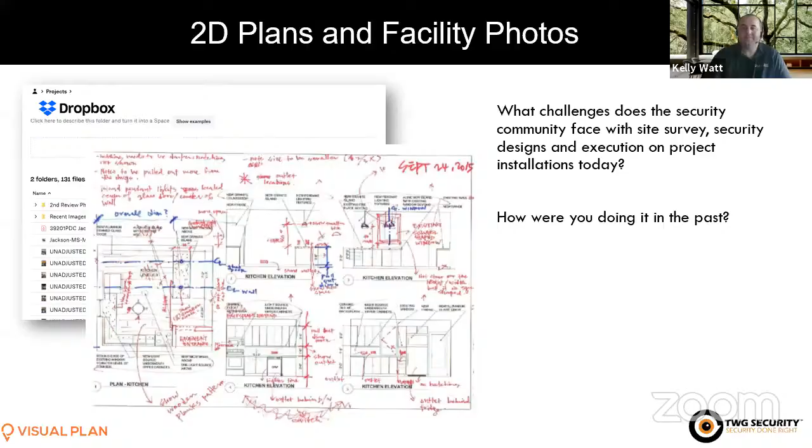Obviously we're doing a lot of remote stuff now, and being able to go into a building one time and scan it, literally take a digital twin accurate to millimeters back to my office and have my entire team look at it—instead of one engineer out in the field rushing around with clients who have much better things to do than spend all day with us. It's been useful for us in current conditions.

So tell me about the evolution here. You started some research—how long ago was that? What types of technology were you looking at? What did you learn from those, and where did you end up?

Great question. We started with a simple 360 photo camera several years ago, which worked out great. I can walk in, push a single button, and capture an entire 360 photo of a room. It worked out great.

I'm a very visual person, so if I take the photos and look at them a couple days later, I know exactly where I was in the building. But I can't just dump a bunch of photos on my engineering team—they look at me like they don't know where this stuff is. So I've been trying to build our own Google Street View, where I can take those photos and drop them on a plan, making it easier for people to understand, while trying to reduce production time. I don't want to hire somebody just to sit and put photos on a plan and manage that whole process—trying to keep it simple.

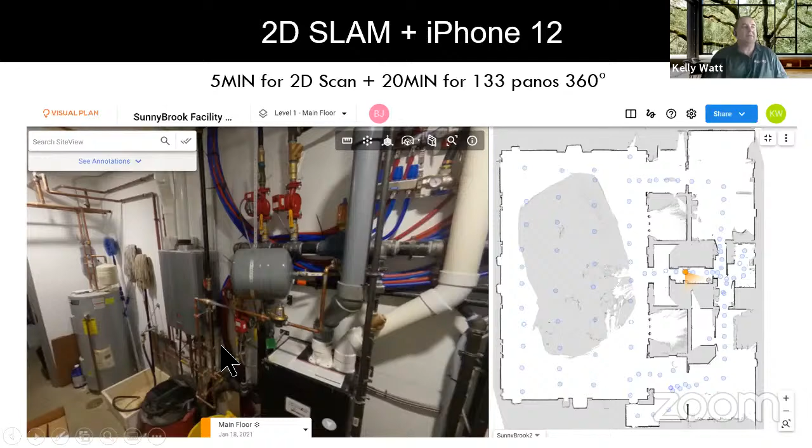So I have another example. We were playing with some 2D SLAM here, giving the audience an example of about a 50,000 square foot footprint from a lower cost sensor that can generate a diagram to trace over, along with 360 imagery at the same time. This is about a 5-minute walkthrough with the SLAM, and on the other side, 20 minutes of photographs, about 133 panos, just to show what's possible.

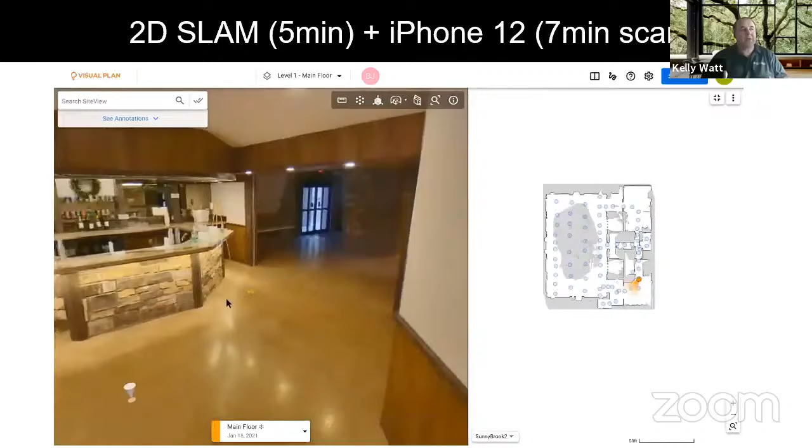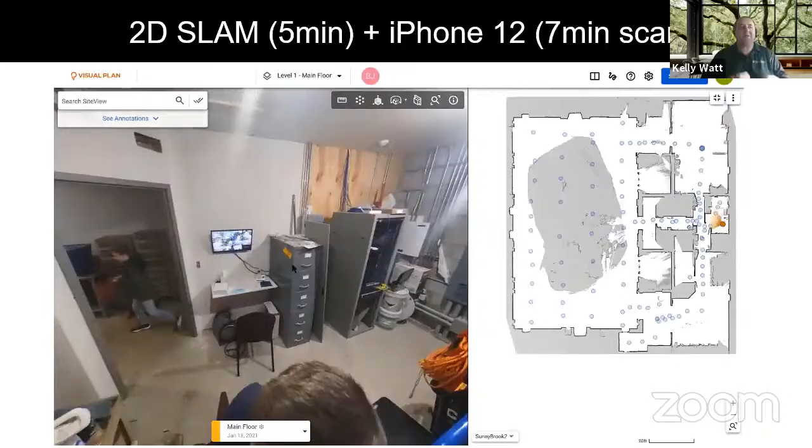I'll run this video in the background showing the immersive experience, whether it be a point cloud, which we'll show in a second, or imagery. There's a lot of opportunity where visualization plays a critical role to remove people from the job site, but keep their foot in the job site virtually. It also comes with tagging assets and bringing in other rich media and documentation.

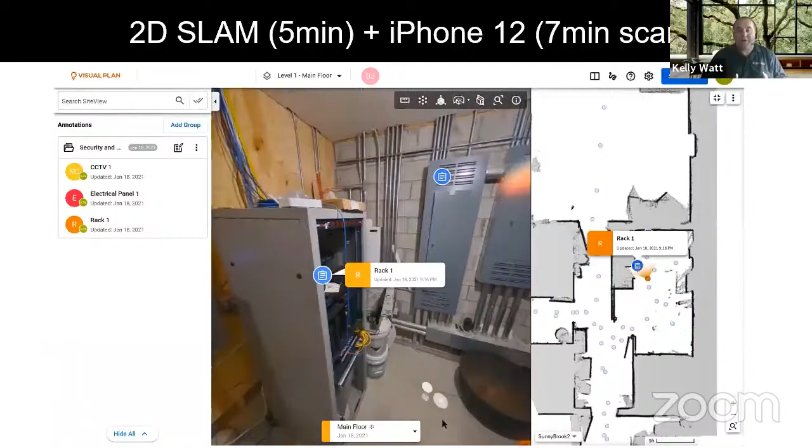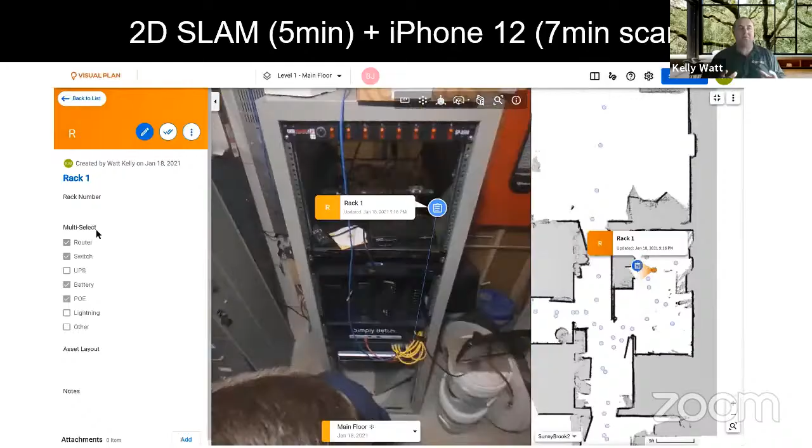We did also play with the iPhone on this particular project, and I'm really impressed with where we're going with a sensor on a phone. It's really quite innovative, but there are definitely some limitations on accuracy, scale, and size. So if you have a small room and you want to knock out a floor plan, and a few inches or more is not a problem, sure, that fits the bill.

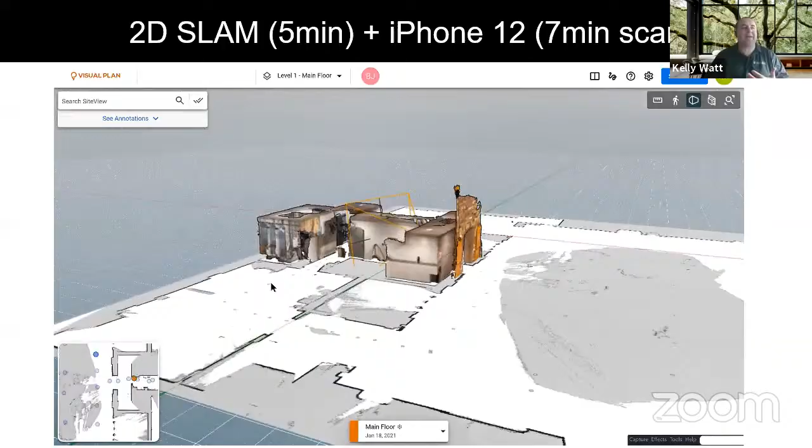But if you're looking at bigger structures, 2D SLAM was a good idea, or getting a BLK is the way to go. This is a point cloud generated from the iPhone - we were on site and imported that raw file format right from the job site, and the SLAM data as well, directly into our software. So just showing some different accuracy levels and different abilities to capture data, but again, it depends on what your outputs are and what you need.

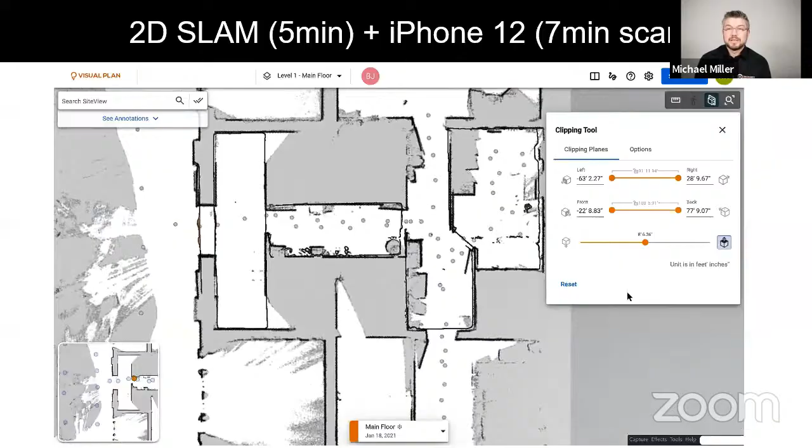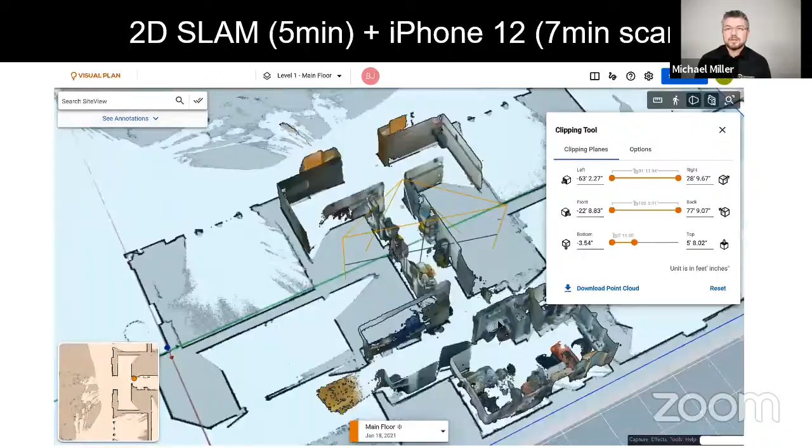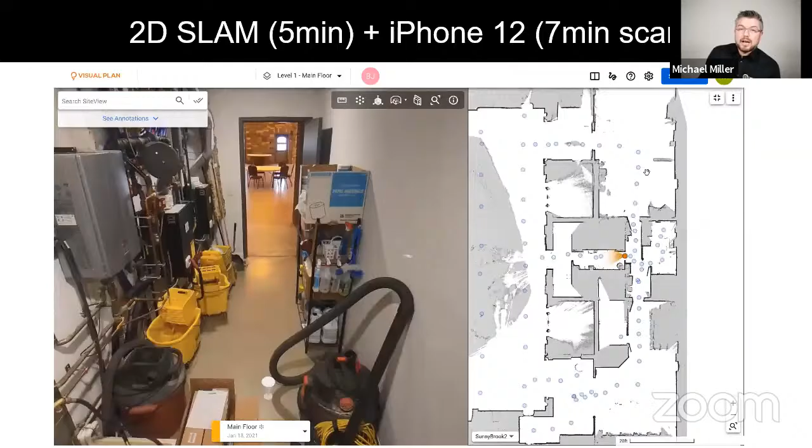I definitely think the iPhones are going to help bring awareness to Lidar. Now people have it in their pocket, and I love technology - I've loved it since I was a little kid. It's kind of like some of the dreams I had when I was younger, some of the stuff I saw on television or movies, is now literally in my hand, and I can create some really cool stuff with it. So yeah, I'm excited to see what's going to happen with the iPhones.

And it's good for us too, because a lot of clients have never heard of Lidar. So I can pull out my iPhone, do a quick scan, and show them instantly what it's going to look like, and then say, hey, I can do this on a much bigger scale with the right tools.

A quick question from the audience: SLAM is an acronym for the type of laser scanning we're dealing with here. It's not a brand - the technologies we're using are SLAM based if they're mobile. I can get into a technical conversation, but we'll keep that offline. I can answer that, but unless you have anything to add to that, Mike. No, I think we're good there.

Okay, talk to us about what we're seeing here. This is generated from the BLK. What are you doing with the data? What are we looking at here? Yeah, so this is actually one of our first scans we did - this is actually our new office that we're in.

It probably took us about an hour for this, and this is right when we got the unit, so we were just getting acclimated with the optimum way to scan buildings. But even if it took an hour to scan a building of about 12,000 square feet, you can get very accurate diagrams. If you're looking for beautiful, this is not it—this is giving you accurate data that you can use to create plans and understand elevations of your projects.

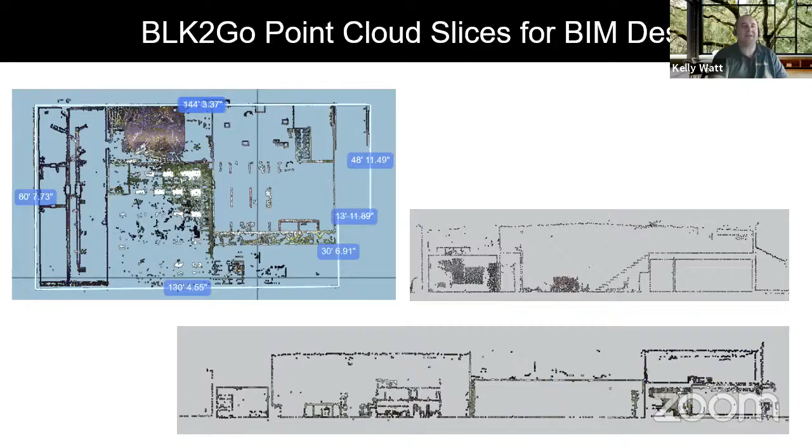Absolutely, and you can trace over it to create 2D and 3D designs. How long would that take you from a tape measure or a laser meter, which is what we used in the past? In the physical security world, to go around and measure an entire building like that would just take forever, so you're typically just sketching something down on a napkin and hoping for the best.

And that's prone to rework, change orders, mistakes, miscommunication, and multiple site visits. At the end of the day, we're talking about costs—what is the cost? You do have to invest in the technology and get acclimated with the software a little bit, but you've got to look at the ROI. What do you save from this?

Not only doing the design work, but I also have to tell a bunch of technicians where to install stuff. If I can place cameras in precise locations in 3D space and have our technician literally walk through a digital version of the building before they even go on site, there's a massive amount of efficiency we can gain from that.

We're looking at the interface from Visual Plan here, where we have some particular annotations given to the field tech. So a subject matter expert, or your high-priced person back at the office, can now be virtually on site instructing and giving feedback without actually having to be there, correcting problems before they go wrong.

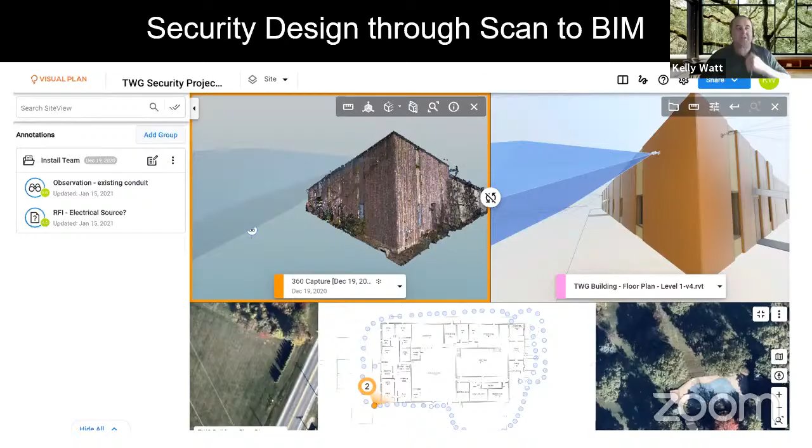We've got the 3D BIM model on the right, the point cloud on the left, and the overview below with the 2D CAD, and all of those blue dots represent 360 imagery. So we have all things 2D and 3D in one place, and you can toggle between point cloud and imagery, or just look at the BIM.

We use Autodesk's Forge plugin, which brings in any type of BIM file, whether it's Revit, Navisworks, or SketchUp files, or IFC, which is a common file format. So we're bringing in the 3D and getting that information out to other people.

That's the biggest thing for us, I think—that the 3D designs always live with the designer and the engineer. But what about the installer? What about the other contractors? There are so many people who'd find value in this information. Why can't they get access, and why can't they get a software that is as easy to use as Google Street View?

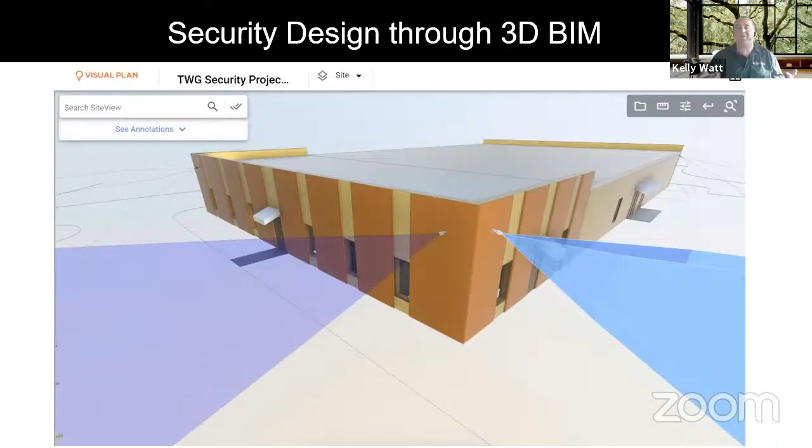When we first got the scanner to play around with, we scanned a project just to test it out. We had about a 40,000 square foot building. We went out and scanned it in about half an hour, 45 minutes, and the client was amazed—we were able to produce accurate floor plans, including the warehouse with all the racking and everything, the next day.

Then they wanted to see what the camera would look like if it was mounted up in the rafters—what would they see? We were able to go into the point cloud, orient our view, and give them an approximation of what it would look like, and they were completely blown away. We won the project because of it—it definitely adds some powerful tools for physical security.

It's a big differentiator, and it's really interesting because security is on the forefront of technology, I find. They have such cool technologies and there's such awareness. But when it comes to 3D and BIM and design, it's actually new, isn't it? You're not at the same places where traditional civil and architectural engineering firms are, where they've been in this world for 10 years. I think you're at the forefront of bringing this technology to security, so that's great. But any thoughts on that, and on the value of cloud sharing here?

Yeah, like I said earlier, I've been in technology since I can remember, and I didn't know this existed. We started looking around and like, wow, what's this 3D laser scanning thing? And then started diving into it, and we got connected, and it's amazing, and not just in physical security, but there's so many uses for this in the world. It's amazing.

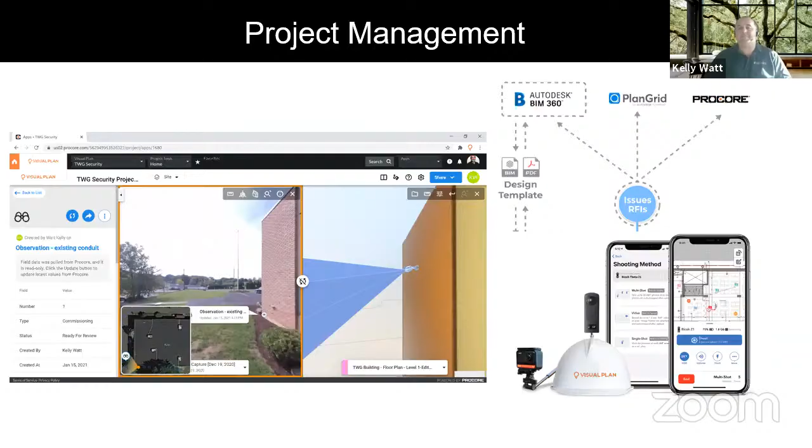Yeah. So I think there's also value through the process when you start to work with general contractors and construction companies that use established project management software like Procore, PlanGrid, or those working with BIM 360. So for the audience, all of those are bidirectionally synced, we work with those platforms so you can send your RFIs, your issues back and forth seamlessly. And our interface is actually embedded directly in Procore, so you can have the virtual job site within project management, which is pretty cool stuff.

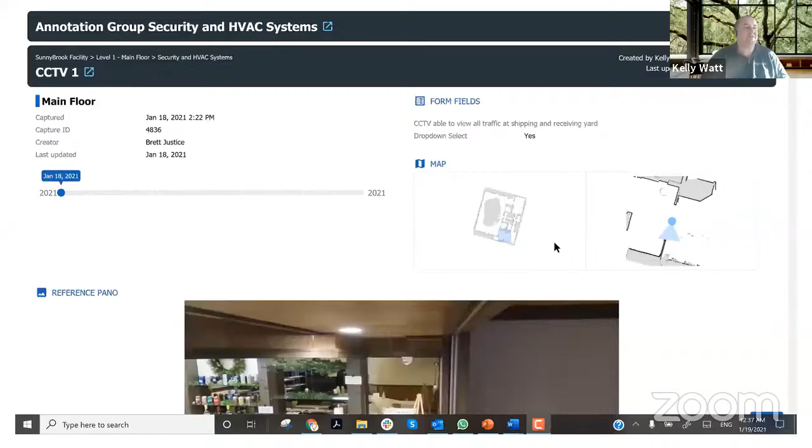Yep. And as you're mentioning, asset tagging is similar to RFIs and issues. We're just basically geospatially tagging information to the tour. So it could be documents, it could be video, it could be web links, that sort of thing. And then being able to generate some type of reports quickly with a single button. So this is an asset tagging report that I generated from our software. It shows the 2D, it shows the area of interest, and a snapshot of the asset, what we're talking about.

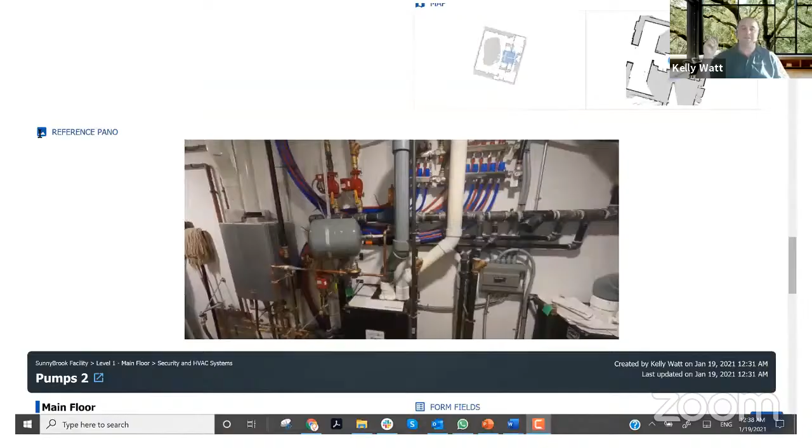The cool thing about these reports is they're dynamic, meaning I can touch the link at the top of this report and it brings me directly to the visualization, and not only to the visualization or digital twin, but to the exact location within that tour. You can have a big complex hospital, it brings me to the exact room and perspective view. And not only is the data available from the imagery and the annotation, but Lidar, BIM, anything hosted in that environment is also available for you.

Yeah, it's almost like a digital glass table where I can throw all of the data that we gather and then correlate it together. So it makes sense for people who haven't been on site, they can understand what the information is, and most importantly, where it is on the project.

Absolutely. And I think there's a lot of value post-commissioning. We do this for our owners all the time as we build all these materials, and we do this data dump on them.

Here's their instruction manuals, the drawings and the pictures, and there you go, make sense of it. The unfortunate thing is that data just gets stored somewhere, in a file cabinet in the old days if it was physical, and in someone's desktop folder. But who gets to see it? Who gets to use it?

So having a cloud platform and having everything there allows facility operations to use this on an ongoing basis. There's a ton of value in maintenance, and you'll be able to use this with new tenant improvements and all sorts of things when you need to change building and manage building information.

Sharing information is one of our biggest challenges. We document everything very meticulously on our projects, but every time we hire a new employee, getting them up to speed on things is a challenge. But now, if I can tie all that data to a 3D scan, to a 3D design, and they can literally walk through the building, it's going to make it so much easier to share information with team members.

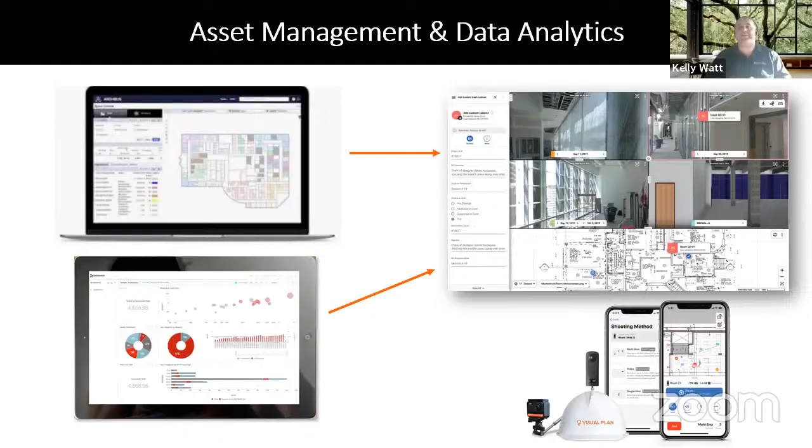And with the deep links, we're able to take asset information and notes and link that into facility software, even to analytics. So if you're interested to learn more, give us a call.